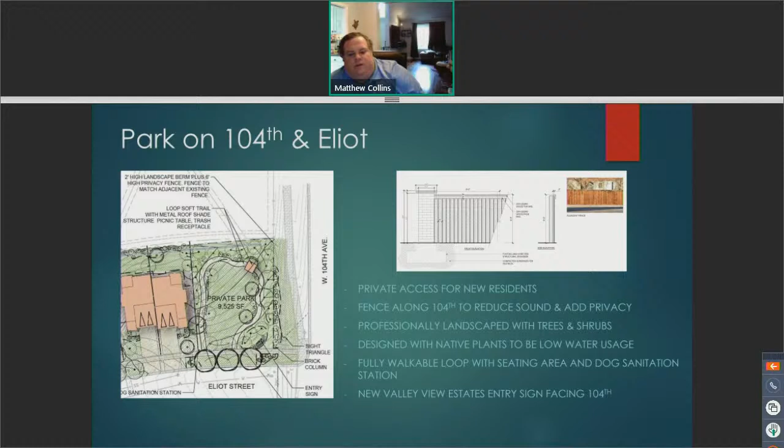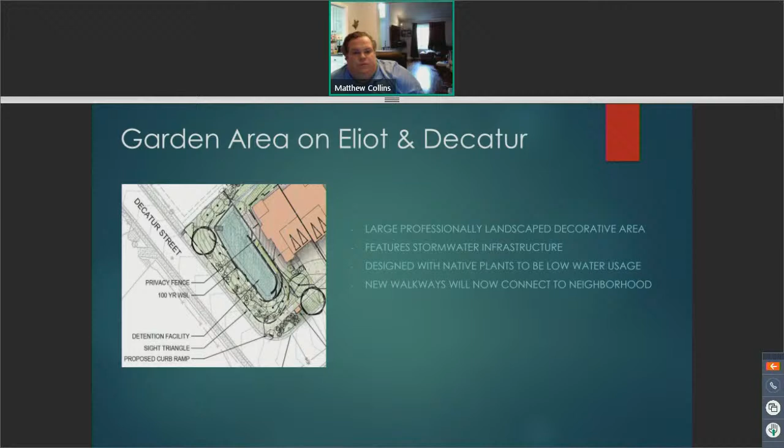Here's the landscaped area at the bottom of the hill. The little arrow that says detention facility notates what we have here is the stormwater infrastructure, and around that there'll be lots of landscaping. The larger items of landscaping are set further in to make sure that we're maintaining good sight lines around that corner for the moving traffic. Next slide, please.

That might be it, actually. Yeah, cool. Thank you, Matt.

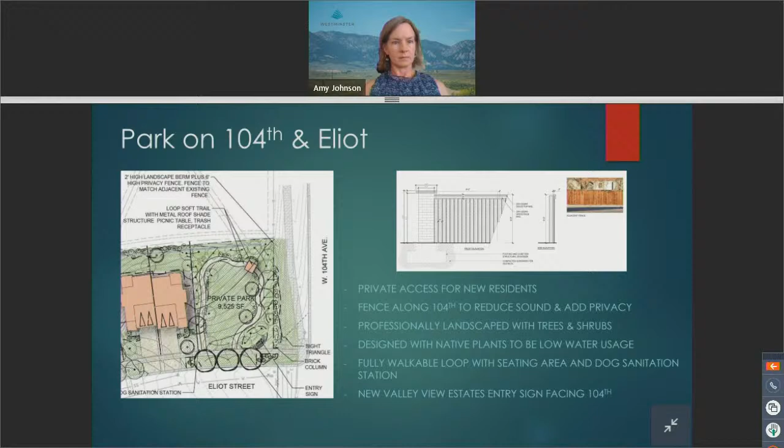I will go back to the site plan, just to point out some details that may not have been obvious before. So just to clarify, these are attached homes, also known as duplexes. This one building right here is 2 units. And so that's how we have the 1, 2, 3, 4, 5, 6 buildings with 12 units. I don't know if that's helpful.

I can also say that, as John had mentioned before with the comprehensive plan, we do have this property designated at a density, R8, that would allow this number of units on this amount of land.

Amy, I would just add that, based on the illustration you're seeing here, there's actually 12 lots. There's 6 buildings, but there's 12 lots. Each unit will have its own lot in addition to the common areas, which would be the private park space as shown on the site plan, and the detention facility. Those two would be common areas between the ownership. Yes, thank you.

Okay, the next question is, the Knights of Columbus, when having events, has parking all the way down the street. What happens when this occurs? Is there public parking on Eliot, as this road can be very narrow? What then happens?

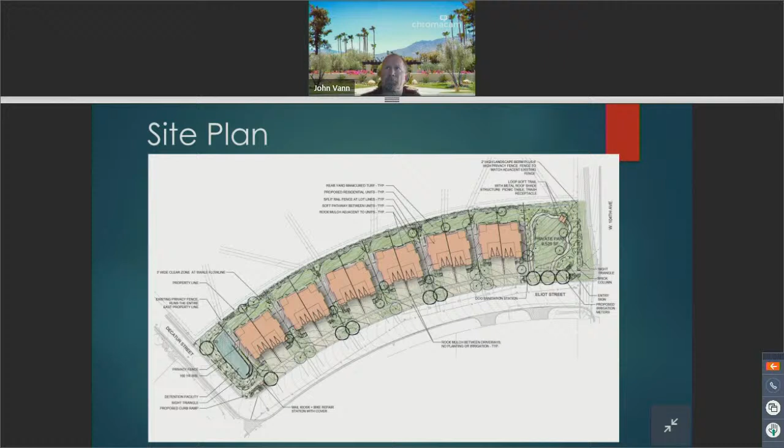All right, thanks John, thanks Matt. The next one is from Kurt Williams: in the letter we received, the rear view of the development was not included, so tonight's the first time we've seen this. The elevation differences raise drainage concerns, given the slope. How is that being addressed?

I think we're talking about the drainage swale that runs across the rear of the properties. Cameron can come back on and speak to that. Sure, Amy, thank you. As far as the slope and grades, again, they're walkout lots, so we have about 10 feet of slope from the unit's driveway as it goes back towards the east to get to that walkout area.

But then, as you mentioned, there's a drainage swale offset from the property line by about 7 to 10 feet. The drainage that slopes down towards the east is caught in that swale and then conveyed in a northerly direction to the bioretention pond. It's sized for the 100-year event with a foot of freeboard to meet requirements. That basically means any runoff generated on our site will more than adequately be captured in that swale and routed north, not spilling over onto the neighboring property.

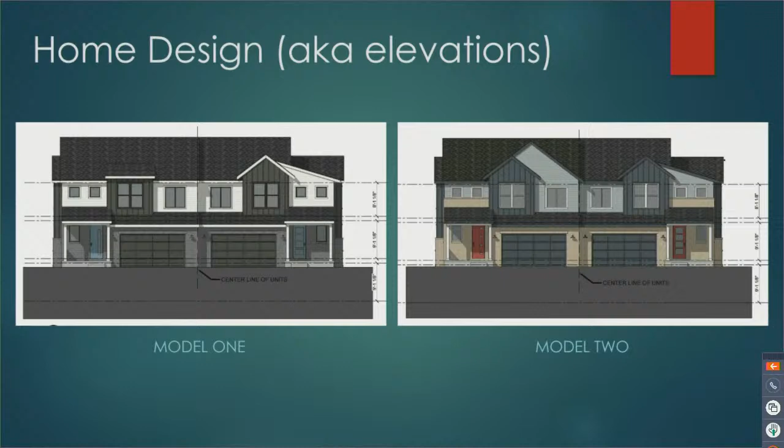And that's the center point of the swale. For those who don't know what a swale is, it'll look prettier than a ditch, but it's basically like a ditch in the backyard, with a low midpoint to gather water, return it underneath, and to some extent have it flow down to the detention pond.

And that center point of the swale, you're saying will be roughly, it'll differ for each lot, but 7 to 10 feet at least from the back fence, from the existing fence line of the neighbors. Is that correct? Right, yep, that's right, Matt.

I think that probably gives the clearest picture of what we're doing to address it, because from the back patio there'll be a downward slope, but then at its lowest point it'll be about 2 feet below all the dirt along that fence. So it'll go down towards the swale and then come back up before it hits the existing fence lines. That's how the backyards will handle the drainage. Is that about right, Cameron? Yep, exactly right.

Thank you, guys. With all the interest on this, I think we'll definitely be looking for a cross section showing all the way through here, all of that grade, and representing approximately the height of the adjacent houses, so we can see that whole relationship in the next submittal. Okay, no problem.

Thanks, everybody. So the next question is from JP, and JP asks, will this be affordable for seniors, or will it be market rate? Matt Collins?

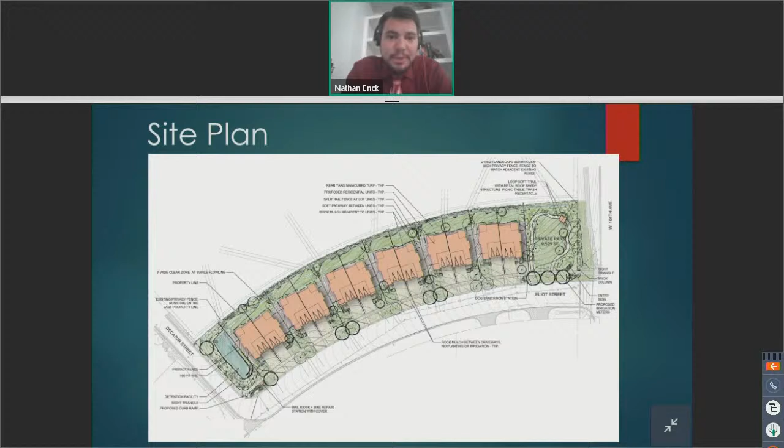And yes, we do have to push that snow somewhere, and in winter months when we have a lot of snow, and especially the last couple of winters we haven't had a whole lot of melt off, we need somewhere to store it. Oftentimes we do use the public parks or those less used areas to store that snow. So the residents will take care of their own driveways, but the snow storage for the streets will likely stay the same.

Okay, thanks Nathan. The next question is from Jana and Stephen Kretzel. What is the proposed sale price? This will affect our property value. I think Matt touched on that, but Matt, do you want to reiterate any of that?

Just real quick, we don't have a proposed sale price at this time. We're still relatively in the future, and the market's been very dynamic in the last year. But our intention is to have this raise the property values, we hope, of the surrounding neighborhoods. Our intention is to hit a higher price point per square foot than the existing homes in the neighborhood sell for now. I know that's not an exact dollar amount, but I hope that answer helps.

All right, thanks Matt. Next question is from Kathy. I have a retaining wall in my backyard that has been built. I am very concerned about landscaping and trees. What kind of root system do these trees have? I'm very concerned the root system will push out my retaining wall. If this happens, I'll be very upset. Who will pay for this if there's damage done to the retaining wall from the tree root system? Will there be trees planted behind my property, and if so, how many?

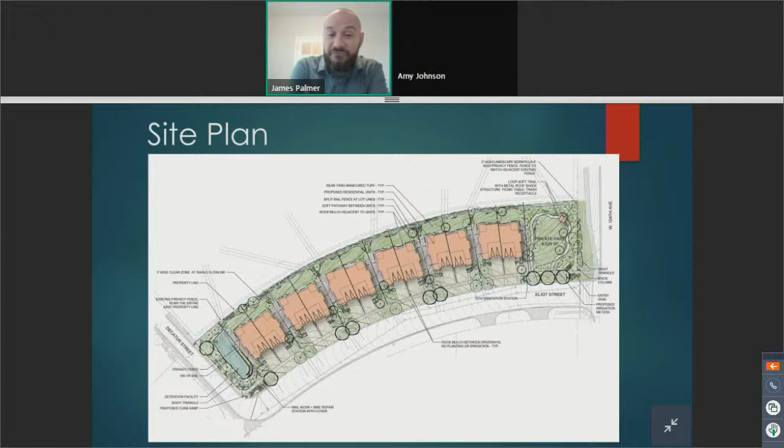Thank you, James. Yes, please, we welcome any input on this. In addition to the applicant being concerned about this, staff is happy to comment. If you live toward this end, toward Decatur, these trees appear like they might be a little closer than some of the ones shown at the other end. So especially if you live in this area, we can make sure these are pulled away a bit if they're too close for your preference. Other neighbors may want more landscaping, so we're happy to individualize that with your input and feedback.

I'm also happy to speak briefly to the liability issues Kathy asked about. I'm not an attorney, so I won't speak to it a ton, but I've come across this issue in my real estate career more commonly with sewer lines than retaining walls. The precedent, both nationwide and in Colorado, is pretty clear that if you have a neighbor, any neighbor, and you can prove their tree has harmed something on your property, such as a sewer line, that neighbor could potentially be liable. You have to give notice about the tree and show there was damage to your property. That's something I'd recommend speaking with an attorney about, as opposed to a neighbor or developer. But there is precedent that if a neighbor's trees are proven to harm something in your yard, they could potentially be liable.

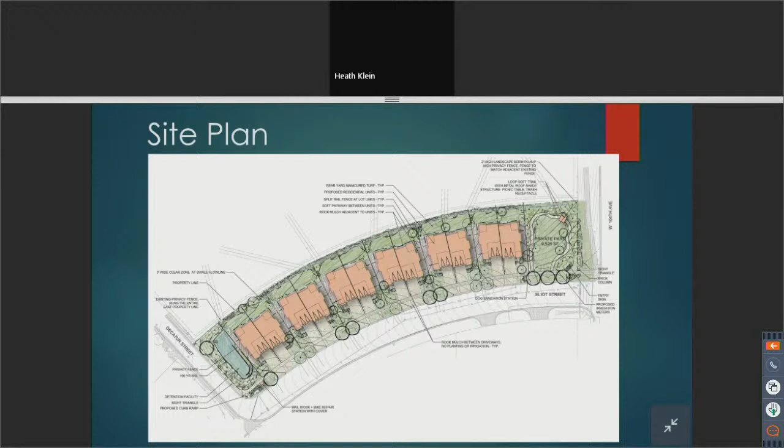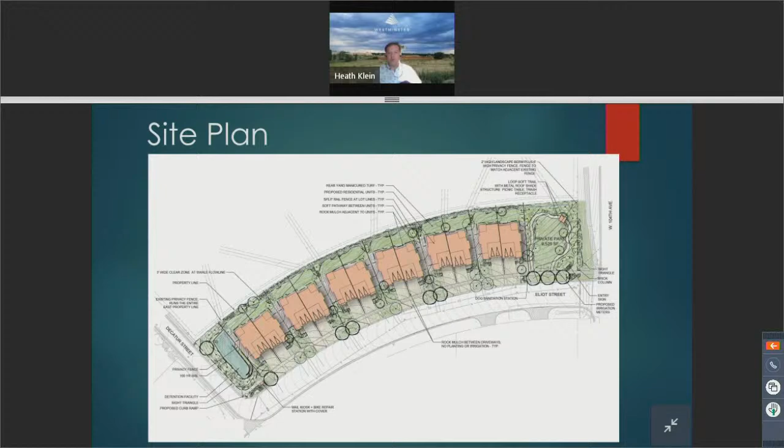Agreed, but if you work or are going south to the grocery stores south of 104th, it is believed there would be more traffic that would go that way. It would not make sense to go up to Boucher Way to go south on Federal Boulevard. Yes, there is some waiting at the signal, but you also have to wait to go south at Boucher Way, and I believe that is actually a longer wait than what is happening at 104th. Thank you.

All right, next is from Kathy, and I think I can answer this one. She's questioning why a park would be so close to a very busy street on 104th. Wouldn't this be a major concern to be so close to a busy street? I would think this is a significant safety issue, especially for small children, fence or not.

I think, Kathy, a couple of things factor into the location of the park there. The city does require a decent setback for houses and buildings away from those streets, for some of the same reasons you're concerned about the park being there - noise, distance from the street, and safety. So this space is actually very conducive to a park for those reasons. The park is not occupied much of the time, only occasionally by folks, and there is a fence there that shields the park from noise and other issues with 104th. But really, primarily, the building setback is driving that park to be at that location.

The next one is from Kurt Williams. It's a traffic concern. Future residents would have to back out onto Eliot or back into their drives from Eliot. If heading uphill south, they'll be backing across two lanes of traffic and potentially towards parked vehicles. Could this be included in any future traffic considerations, please?

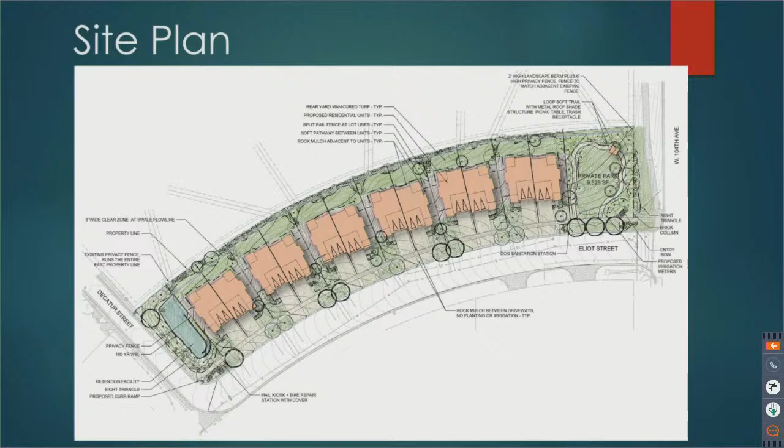I'm assuming you mean the fence between this property and the existing neighbors. I believe Matt Collins spoke to that. Matt, would you like to clarify that particular point? Yeah, as we go into construction and start digging, we're more than happy to speak with folks about whether they're perfectly happy with their existing fence, or if it's something that should maybe be upgraded. It's a win-win if the fences look great - good for us with our values, good for you with your values. On the long-term maintenance, it'll be what the standard in Colorado is, which is that it exists between neighbors. The hope is that neighbors are neighborly, and if you want to replace it 20 years from now, it's a conversation you have between you and your neighbor.

I don't know if one of your people, or maybe Cameron from the survey, knows the existing fence line - is it on our property, or is it on the rear neighbor's property? But whoever it is, if it literally exists on your property, you maintain authority over it. It's pretty common in Colorado for people to just be neighborly with each other, and if you replace it, you talk to the neighbor about splitting it. It's not something we intend the HOA to usurp your control or authority over your fence. I'm not sure if it's on the property of this plot or the neighbor's properties right now, but I think it's probably where the people's existing houses are.

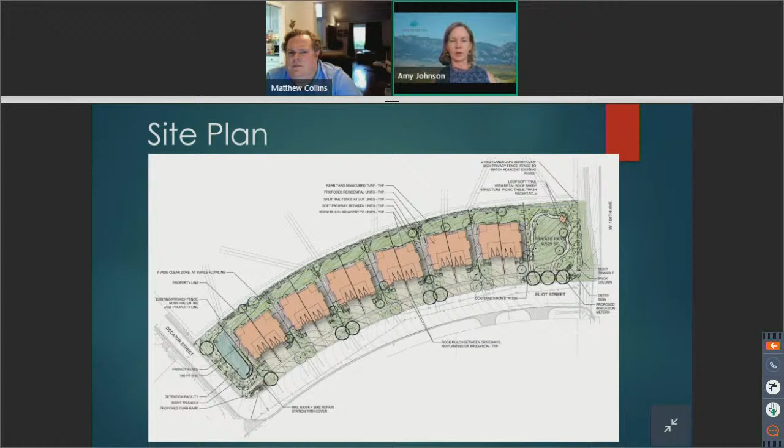I'd be happy to speak to that a bit more. It's common for the fence to be located on the property line, in which case technically it belongs to both neighbors. Obviously we would hope everyone is neighborly and has a conversation about that to be sure. The only way to be sure is to get a survey, which the city does not pay for. So if there was a dispute, that would be a civil matter, and one person or another would have to get a survey done to prove that. But ideally, yes, they just work together.

All right, thanks everybody, next. Cameron, do you know if it's on the property line? Is it on the people who live there already, or is it on our property? Do you know that off the top of your head?

Yes, actually the fence is generally along the property boundary, except for the very south end where that higher fence exists. So basically along our private park in the first two lots, in that area it's a few feet onto our side of the property, but otherwise from there northward it's generally pretty much right along the common lot line.

Okay, so Amy's assumption was accurate, and we have that survey on file - if anybody would like to see it, feel free to reach out. I would assume that if it is on the property being developed, you've already said, Matt, that you'll be having conversations as needed. More than happy to, yes.

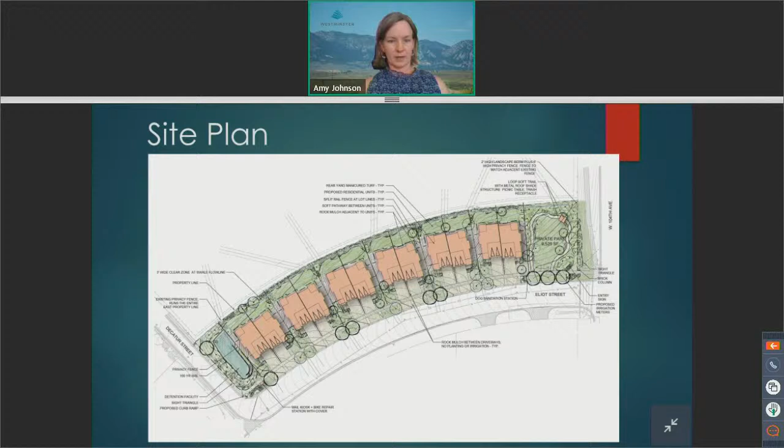I think David Poppleton would probably be the best to speak to building height from grade. David Poppleton: Yeah, I'm looking it up now since it's not in the graphic and I don't remember off the top of my head, but I believe at the highest point - so from the lowest grade at the walkout to the midpoint of the highest roof - it's 36 feet. And then it would be about 26 feet on the front side due to the 10 foot of grade change. Thank you.

All right, question from Meredith Brower: Are you renaming the neighborhood Valley View Estates?

That's probably on me, I think I had said the words Valley View Estates. I thought that was the existing name of that neighborhood behind us, but maybe that was what we had flagged for these 6 homes. What is the name of the neighborhood at large? Is it not Valley View Estates? It can change, we don't always track that. I think it may be Meadowlark, but maybe that's a conversation you can have with the neighbors as well, as to if you're wanting to stay consistent with that.

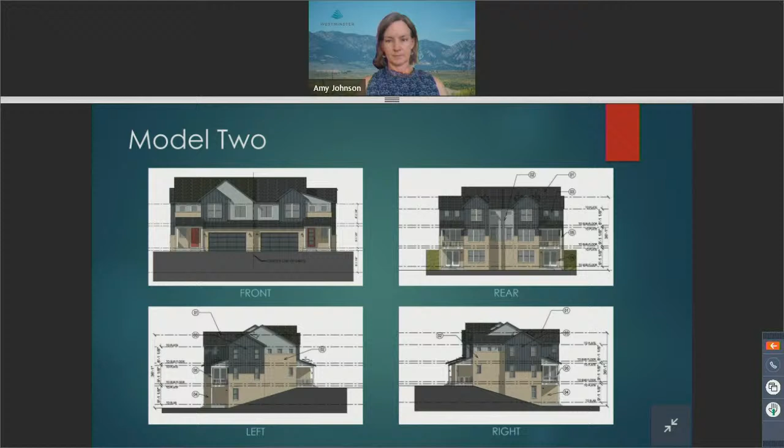And I'll add, for the audience, the city doesn't regulate how many homes a person can buy. So although it's a possibility that could happen, the likelihood would be very slim, I think. I would just say that typically if that was the intent of anyone, that would have been a rental developer that would have come forth rather than someone planning to sell these.

All right, the next one is from Meredith Brower: There is an increasing amount of homeless frequenting the park. Do you have any plan to help prevent them from setting up camp on the lot while you're constructing? This happens when there are large storage units left over the weekends, et cetera.

Yes, the security of the site is of the utmost concern to us. We will absolutely have a security plan in place to make sure that there's no issues with people, with theft, or with people utilizing the land or equipment improperly. Thank you, Matt.

All right, pardon me, my scroll is working very slowly. The next is from Deborah Gordon.

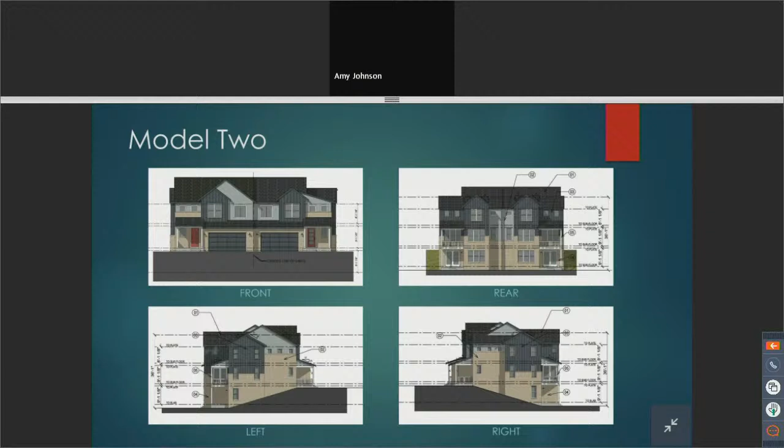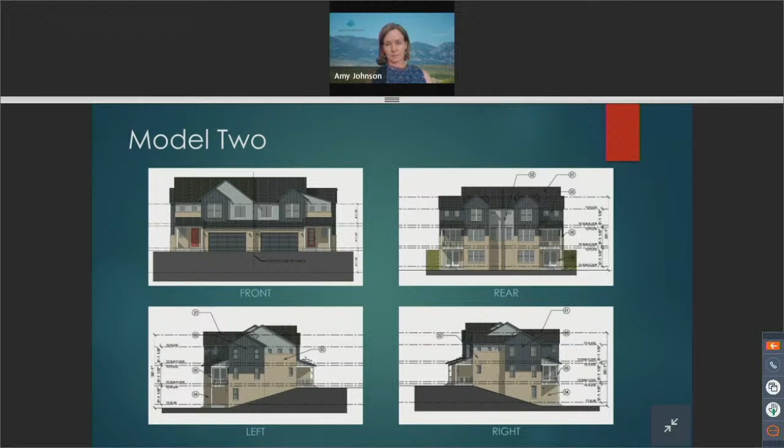Just a comment, like others, concerned about the excess traffic. The Hyundai dealership just opened up, adding more traffic. Now we're going to be adding 24 more cars plus visitors. Extremely concerned. Not sure if the city is also aware of the nightly speakers that the dealership blasts when people enter the dealership after hours - basically their alarm system telling the guy in the black jacket to get off their property. This happens at all hours of the night, very loud, waking us up from our sleep.

Thanks for that information, Deborah. I'm not sure exactly how to respond to that. I think the city has ordinances regarding nuisances. We don't specifically have a noise ordinance, but we do have a public nuisance ordinance. I'm not sure if what you're describing violates it or not, but if you do have that concern, we encourage you to contact the non-emergency police number, or use Access Westminster to log complaints, and they'll get investigated by the appropriate agencies in the city. If there is a code violation of any type, those things tend to get addressed pretty quickly, from my experience.

Next question is from Kathy: As to Matt, if you're willing, as you have stated, I would love to meet with you and James Palmer at 2792 West 105th Drive, so that I can speak to you directly about my concerns. I think that was a response to us asking for the address, so now you have the contact information you need, Matt. And of course, Kathy, you have Matt's information as well. Yes, and we will pass that on after the meeting as well. I'm more than happy to. I'll find some time in the next few days to stop by so we can start those conversations. No problem, okay.

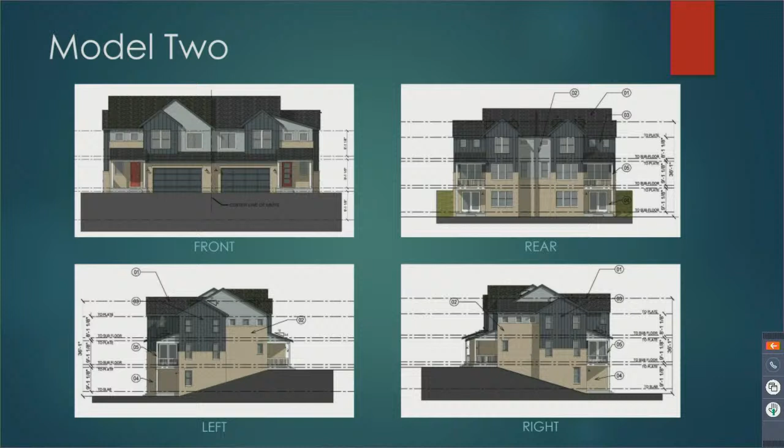The next question is from JP. I think this is back to the comments John Van made about the PLD. John, that's not a city park owned by the city, is also aware of the night. Oh, I'm sorry, goodness, my screen's jumping. Let me start over on that. John, that's not a city park owned by the city and is not an amenity for the residents in the area. So why cash in lieu of the PLD amount? John Van, are you still with us? Yes, I am, just waiting for the camera to kick in here.

So John, or JP, that is a public park, and by law, public parks are public parks. So residents of Westminster can use that, because—and I'm not sure, I'd have to look and figure out exactly what the taxation situation is with Hyland Hills, because there are overlapping districts—but that is a park that Westminster residents can use. The reasons for taking cash in lieu are because there is not sufficient room on the existing development site to provide a public park for the residents of that specific subdivision. Our requirements require 0.36 acres—that's the size of a backyard—and the developer has already provided something like that. So instead, we would be taking cash in lieu. The cash in lieu will then be deposited with our budget office, and will be adequately divided up across our acquisition and development accounts to be used to provide facilities and other needs in the city.

Thank you, John. All right, thank you. And another question from JP: What will the HOA fees be?